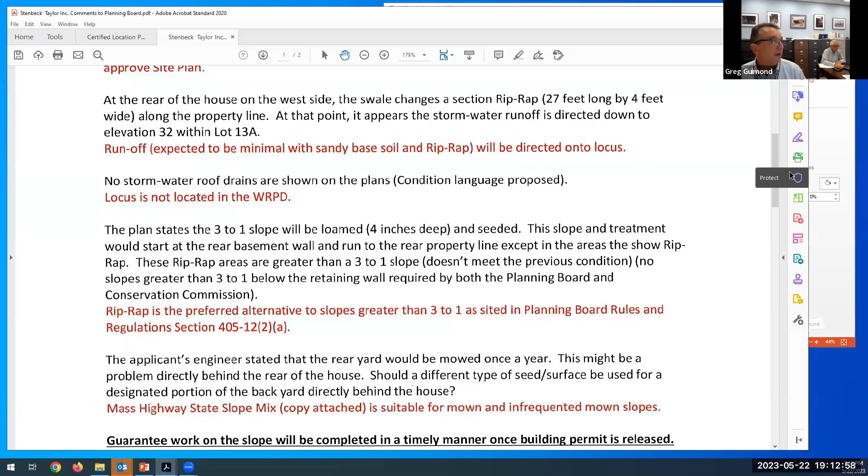The next comment down was we had asked about the mix, because how often are they going to mow it? That's a pretty steep slope to be mowing. The reply back was that the highway mix, which he has changed from what was originally on the site plans, can be mowed infrequently or frequently.

My concern was that the immediate 10 feet behind the house, with that original mix, was going to be a pretty rough surface when you're coming out of the back door of the basement and stuff. I didn't see it as practical, only mowing that once a year. I would think that they would want to mow it more.

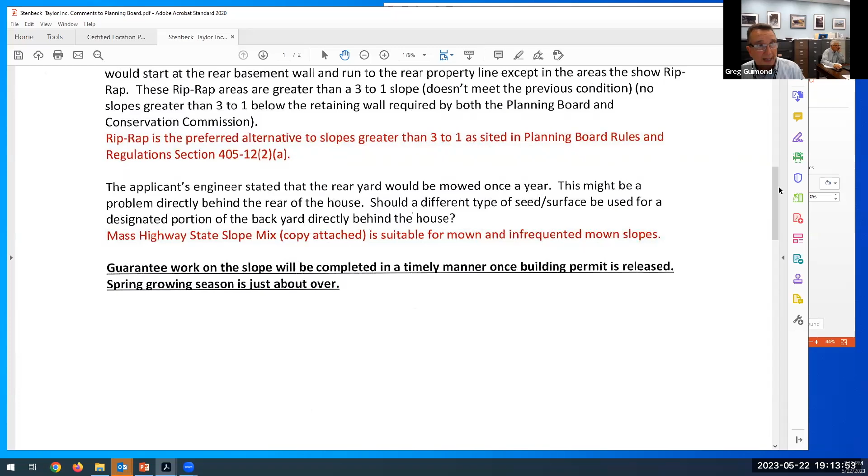And then on our side, just to guarantee that the work on the slope will be completed in a timely manner once the building permit's released - and Ryan did not answer that particular question. So that's kind of where we were. I had drafted a decision with some conditions that addressed most of these concerns, and I don't have anything else to add.

Okay, any of the board members have any questions right now? Nope, just scrolling through.

Okay, so Greg, how would we, if we were going to go forward with an approval on this, how would we make those conditions or changes on the special permit? Most of them we can just put as conditions of your modification to the special permit.

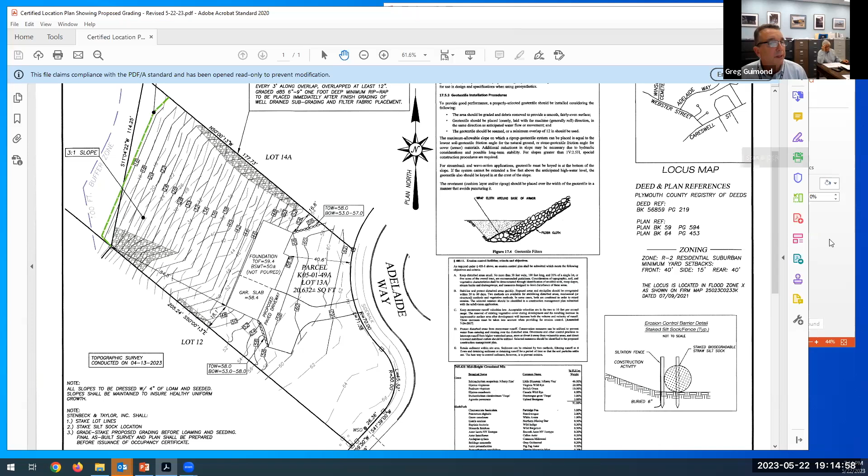Okay, the timing - I tried to write it in a manner that some of these things are immediate. So the silt sock on the rear property line, and it actually should be on this, the two - actually, hold on one second. There's one other thing I should probably just run through quickly.

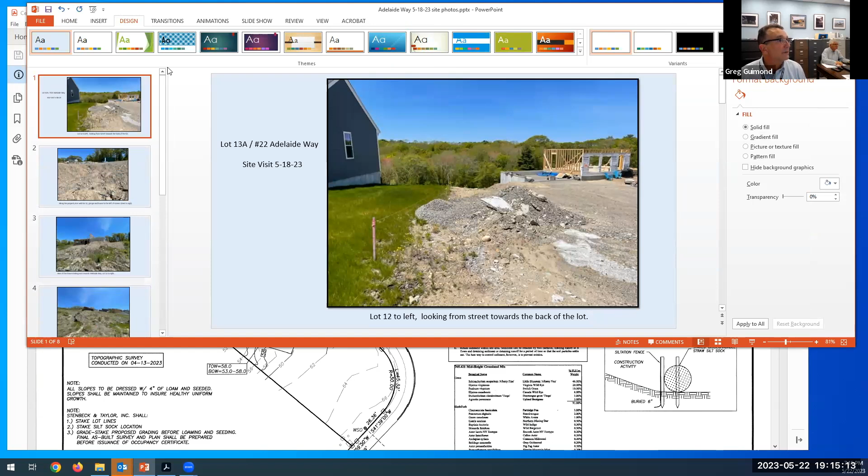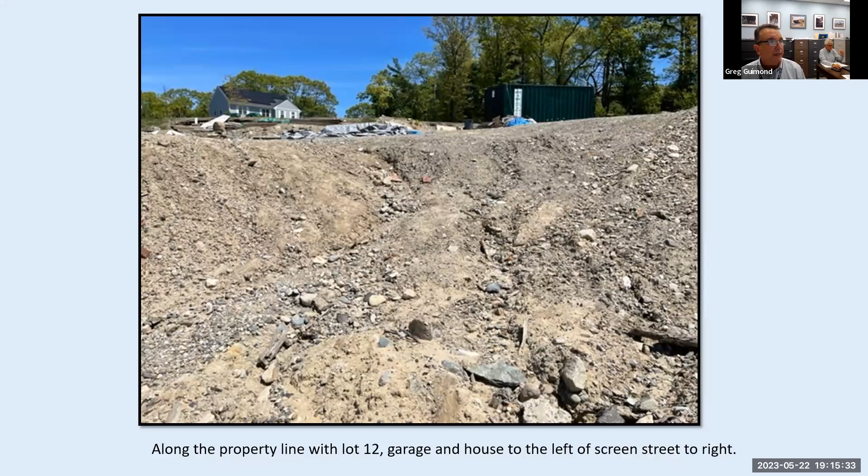So this is from last week, the site conditions. This is the property line on lot 12 between the house and the street. You can see it's kind of pitched down towards lot 12. You can see the type of material that has been brought into the site.

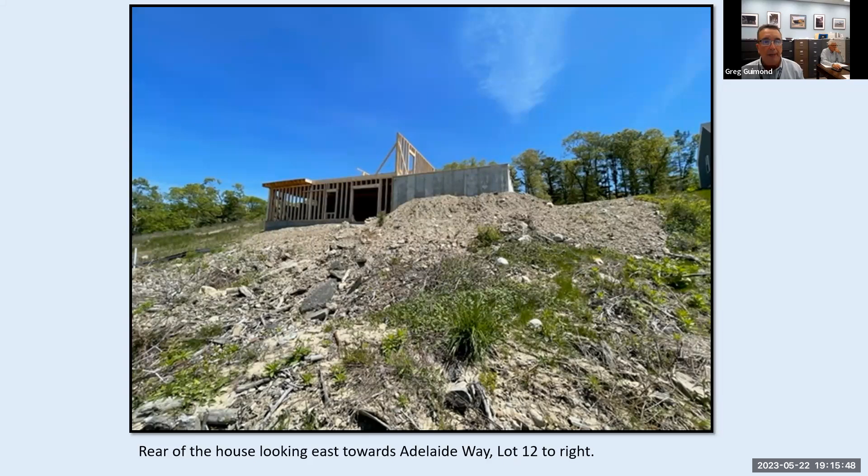This is the rear of the house looking up towards the street. Again, you can see they've added some fill in the back, so it makes it really steep. They would be redoing those slopes.

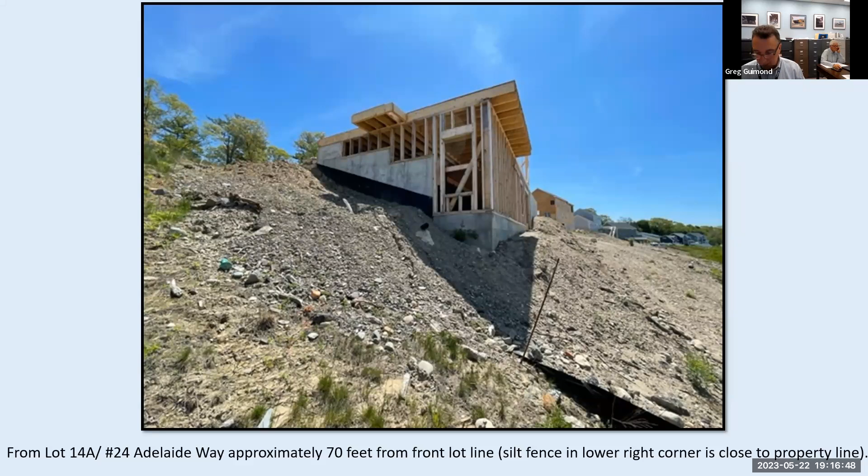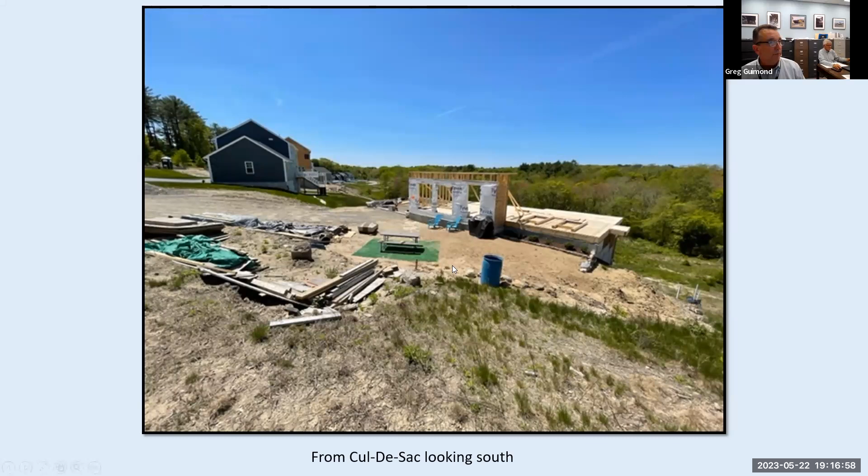Again, this is another view of the backyard. You can see how steep that pitches. This is the front from the cul-de-sac looking in. And that's it, so that's the current conditions on site, and why I was going to also suggest that we add in some erosion control on the two side property lines.

Okay, thank you Greg. Is anyone here from the public for this? Yes, we are. If you just say your name and address and then go ahead. Sure, I'm Chandler Bianchi, 18 Adelaide Way. We're at lot 11. We were just curious to learn more about the town and what's going on. Do you have any questions about this project? No, just out of curiosity.

Okay, is there anyone else here from the public that has a question? I couldn't get Dave earlier when I was trying to see if he could hear us. Okay Zach, I think you're all set, right? All set. Okay, thank you.

All right, nothing from the board. I'm gonna make a motion if there's not. Okay, seeing none, I'm gonna make a motion that we approve to modify the special permit as discussed tonight with the changes that have been requested. Is there a second? Second, it's Kevin Cantwell, second.